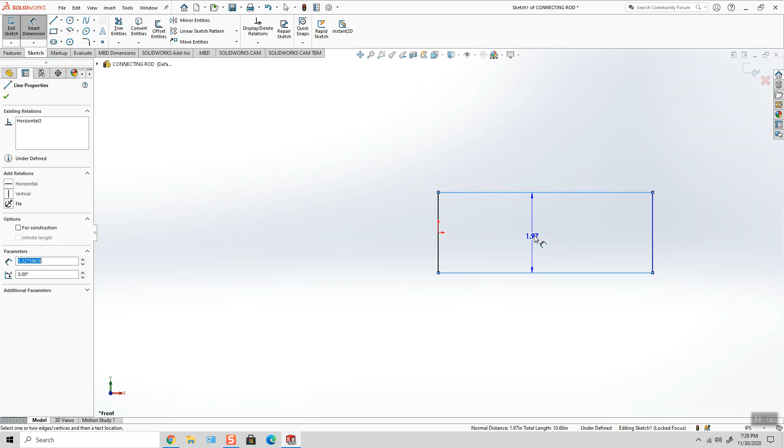I'm going to add a midpoint relation between the origin and this line. I'm going to make the width of this rectangle 0.1, and the length of this rectangle is going to be 0.68.

Now I'm going to extrude this rectangle using midplane to a width of 0.125, and do a quick file save.

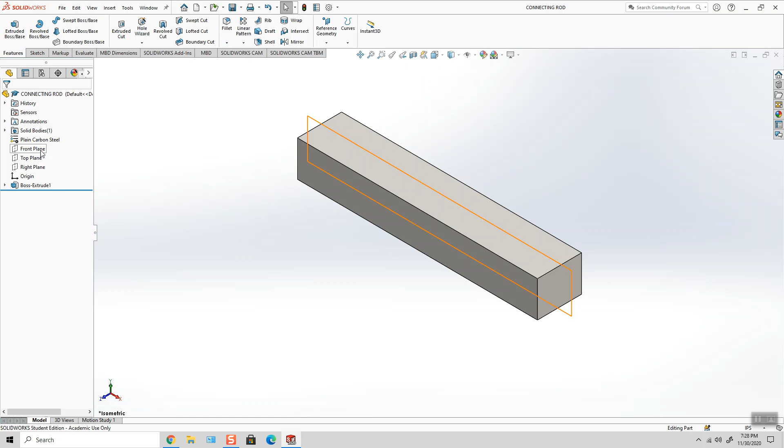Now from the front plane, make a new sketch. I'm going to draw a couple of circles - one right here and another one right at the midpoint of this line.

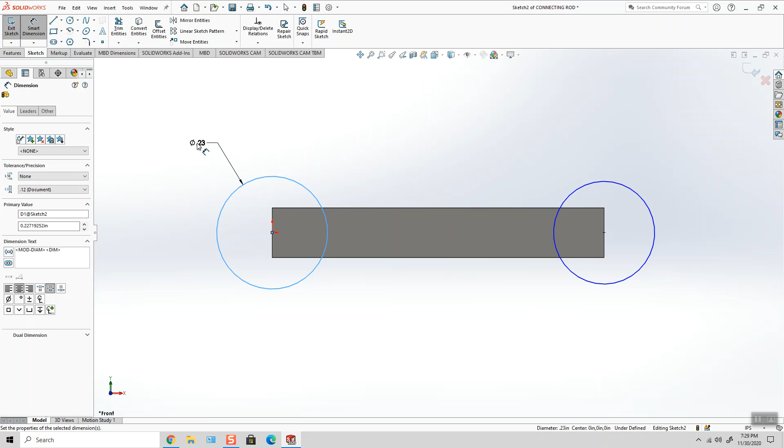The diameter here is going to be 1/4 inch. The diameter here will be 0.2.

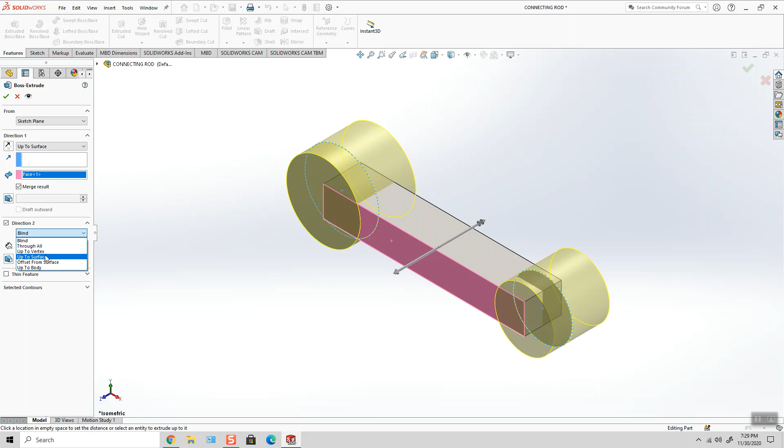I'm going to extrude in one direction up to this surface, and select direction 2, choosing up to that surface. So my sketch remains in the middle, and I'm extruding up to the faces of my initial boss, so that as I change the width of my rectangle, these cylinders follow it.

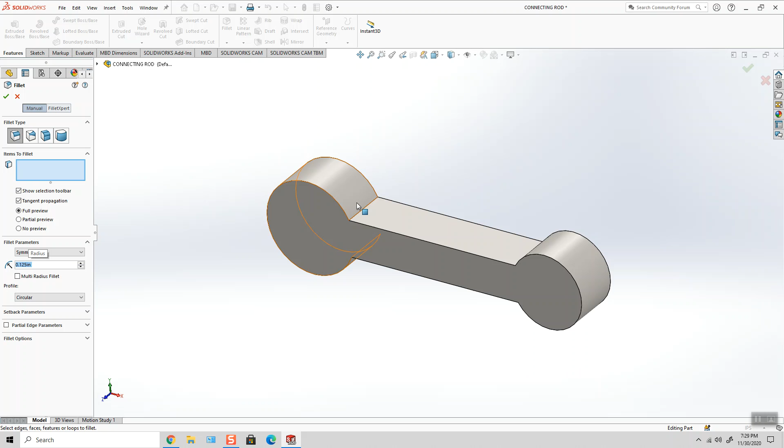And now I'm going to add a 1/8 inch radius at all 4 corners.

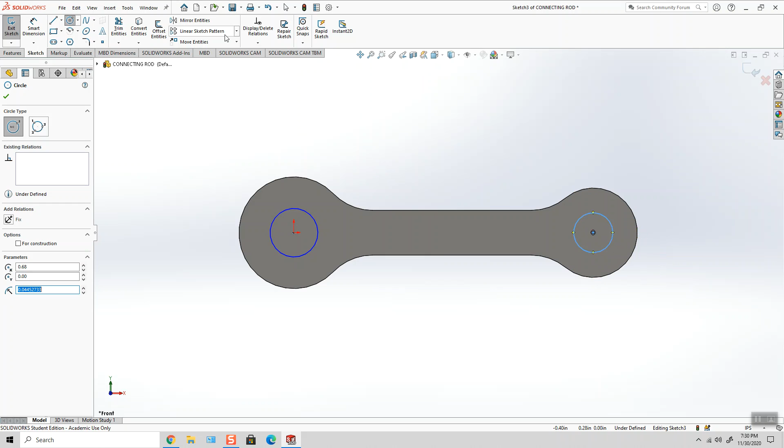Go back to the front plane and sketch the 2 circles. They're identical, so we can use an equal relation.

And because we're sketching in the center, we can do a through all both directions, and the connecting rod is done. Moving on to the assembly.